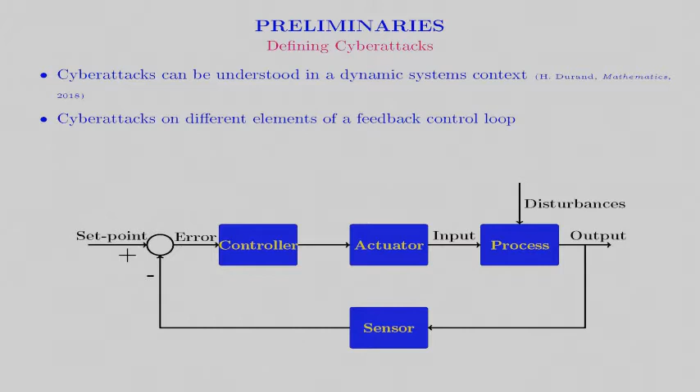In general, cyber attacks can be performed to break a typical control loop at some point. In this talk, we focus on cyber attacks that break the control loop between the sensor and the controller and provide false sensor measurements to the controller. This prevents true process knowledge from being obtained by the controller. As we will see later in this talk, this cannot be handled by techniques for handling sensor measurement noise alone.

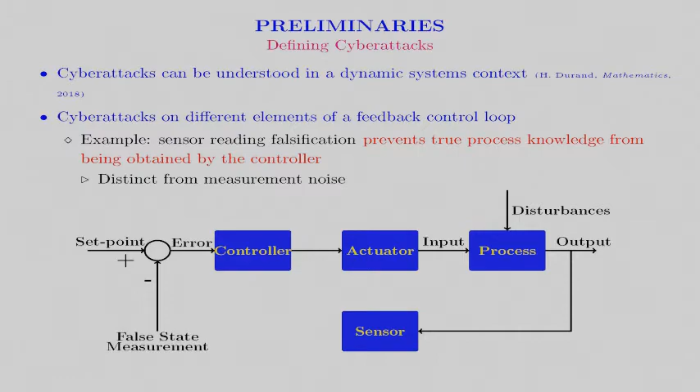In our development of cyber attack detection and control techniques, we will focus on the class of nonlinear systems shown here. This is a class of input affine nonlinear systems with state X, input U, and disturbance W, all of which are bounded. We consider that the origin is a steady state for this system and that the system is stabilizable in the sense that there exists an explicit stabilizing control law H of X that can render the origin asymptotically stable in the sense that there exists a Lyapunov function V with a negative definite time derivative along the closed-loop state trajectories without disturbances for all states in a neighborhood D of the origin.

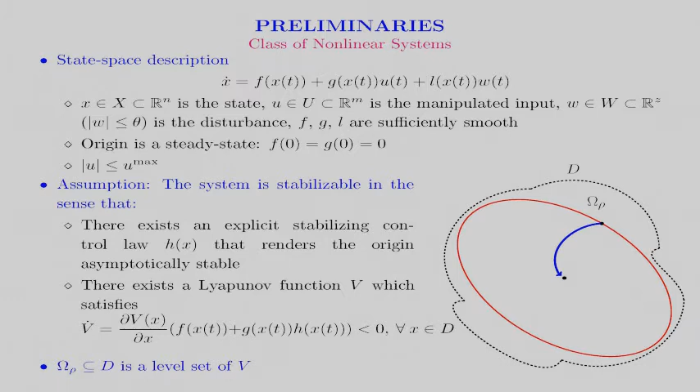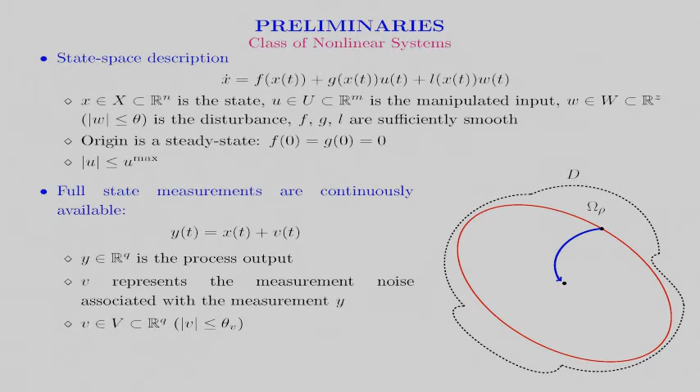We define a level set of the Lyapunov function contained within the region where V dot is negative as the stability region, shown in the figure on the right. We consider that full state measurements are available continuously for this system, but that they are impacted by bounded measurement noise. For this class of systems, we will be exploring the impacts of cyber attacks on sensors for the feedback control law known as economic model predictive control.

The general formulation of an economic model predictive controller receiving feedback of the full state is shown on this slide. It consists of a general stage cost, dynamic process model, state measurement, input rate of change constraints, and input and state constraints. The input rate of change constraints may be added to prevent the control actions computed by the EMPC from being overly aggressive. With additional constraints to be discussed subsequently, this control formulation has theoretical guarantees regarding feasibility and stability in the presence of sufficiently small bounded measurement noise and disturbances. False sensor measurements do not ensure boundedness of the error in the state measurements, and therefore do not necessarily allow these guarantees to be maintained.

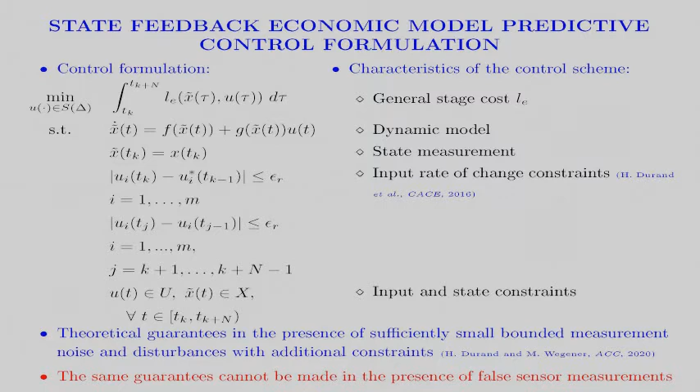The additional constraints which allow the closed-loop stability guarantees just described to be obtained are Lyapunov-based stability constraints that, when added to the EMPC formulation on the prior slide, and with a slight change in the way the input rate of change constraints are enforced for feasibility reasons, give a formulation of Lyapunov-Based EMPC or LEMPC.

This control formulation has two modes of operation, where the first utilizes the constraint shown in red. This constraint requires the state predictions to remain within a subset omega rho E1 of the stability region omega rho. This constraint is designed using the explicit stabilizing controller h of x, and that controller is guaranteed to meet all state and input constraints at every sampling time.

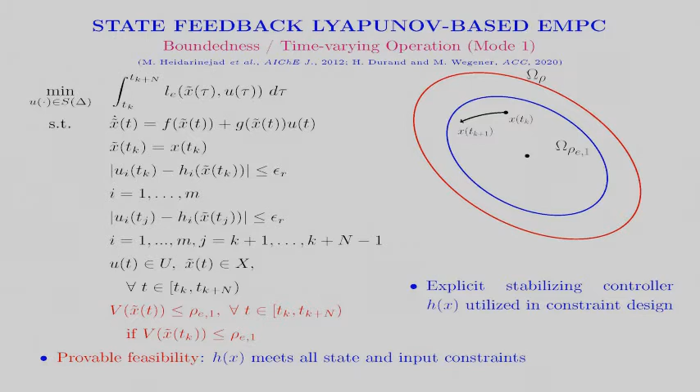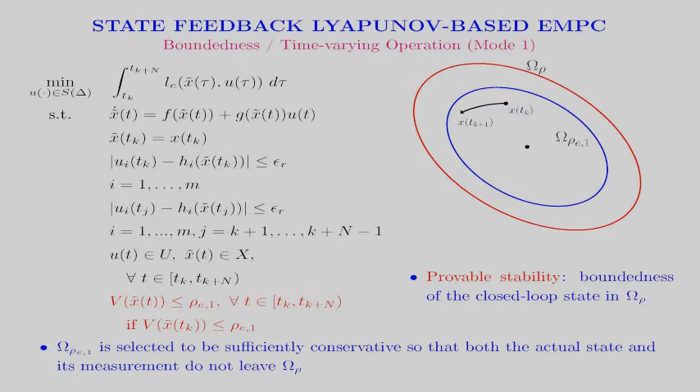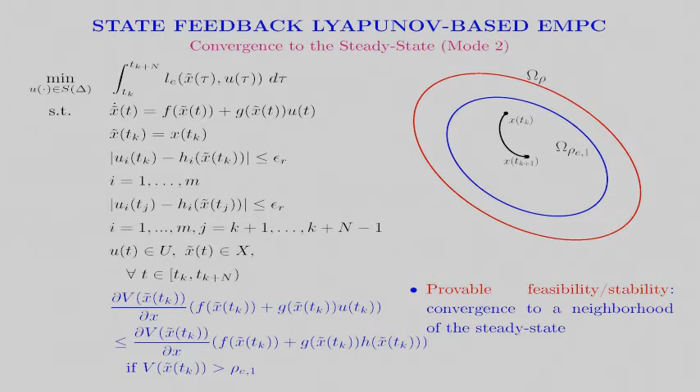Though the control law just described has attractive stability properties, cyberattacks on state measurements provided to that controller could prevent those stability guarantees from being realized. This is because even though the guarantees just described can hold in the presence of sufficiently small sensor noise, a cyberattack may act like insufficiently small sensor noise. This indicates that it would be desirable to detect an attack by looking at the deviation of measurements from the actual state. A method of approximating the actual state is through state predictions from the last measurement.

This gives one idea for a cyberattack detection strategy for LEMPC. The difference between the measurement and the prediction of the state could be checked at each sampling time. If the difference is larger than an expected threshold, the state measurement can be flagged as a possible attack. If it is below a threshold, it should be able to be tolerated by the controller for the subsequent sampling period in the sense that the closed-loop state should still be within a bounded region of operation at the end of the sampling period.

Based on the fact that LEMPC with sufficiently small measurement noise can retain closed-loop stability in this sense, it should be possible to design an LEMPC that can maintain the closed-loop state in a bounded operating region after what I'll term a sufficiently small cyberattack, meaning one which does not trip the detection mechanism, occurs. In this discussion, we see the concept of controller and detection mechanism co-designed for LEMPC, in that the resilience of the controller to the cyberattacks that are not detected for at least a sampling period after the attack occurs will come from the LEMPC's design in tandem with the threshold design on the attack detection method.

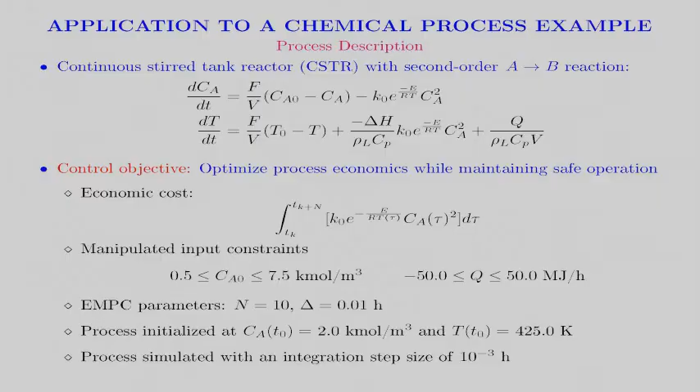This indicates the principle that in the presence of a cyber attack, for which there is a small difference between the actual and falsified state measurements, the inputs computed by an EMPC may not be significantly different. This highlights as well the reasonableness of the proposed method for cyber attack detection and closed-loop stability, involving checking how significantly a state measurement and an expected value of the state coming from the prediction differ.

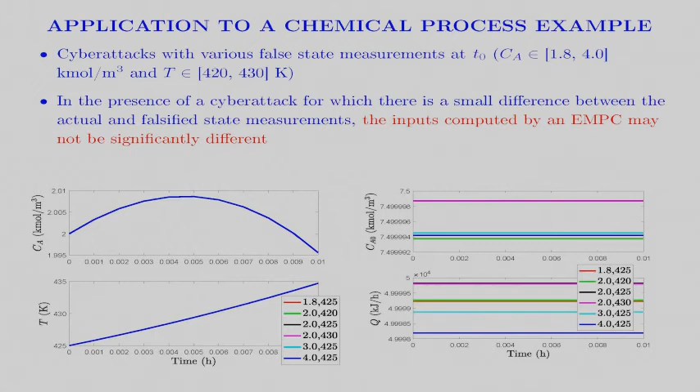Next, we look at how measurement noise and false sensor measurement cyber attacks can differ. Here, we provide a false state measurement to the controller at every sampling time and look at how the actual state evolves compared to the false state trajectory.

The false state trajectory is obtained by simulating the process dynamic model, where at every sampling time, the initial value of the false state measurement is set to be 0.2 kilomole per meter cubed and 5 Kelvin above the predicted values. These are being predicted from the last value provided as the measurement to the EMPC, which was false.

The simulations indicate that despite that at every sampling time, the falsified state measurement is within a bounded amount of the values predicted from the prior value provided to the LEMPC, there is a potential for error between the predicted and actual state to grow over time.

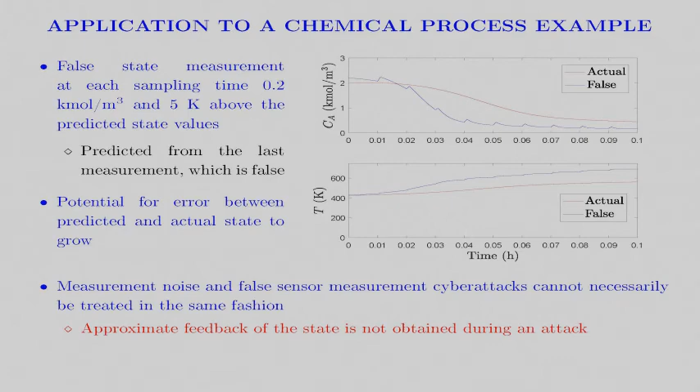This demonstrates the concept that measurement noise and false sensor measurement cyber attacks are not equivalent, because while with measurement noise there is some error at every sampling time, that error is within a range of the actual measurement. In contrast, in false sensor measurement cyber attacks, effectively, feedback of the process state is not obtained, perhaps not even approximately.

These simulations highlight that a key limitation of the proposed method for attack detection and resilient control is that the detection technique relies on state predictions. Once one measurement is falsified, the predictions are no longer reliable. A concept for overcoming this is to replace the state feedback LEMPC with an output feedback LEMPC, meaning an LEMPC that utilizes an estimate from a state estimator in its design.

If redundant state estimators are available and only the one used to provide estimates to the LEMPC is impacted by a sensor measurement attack, the others can be utilized to flag this because, in effect, they provide a check on whether the state estimate being received by the LEMPC is sufficiently accurate.

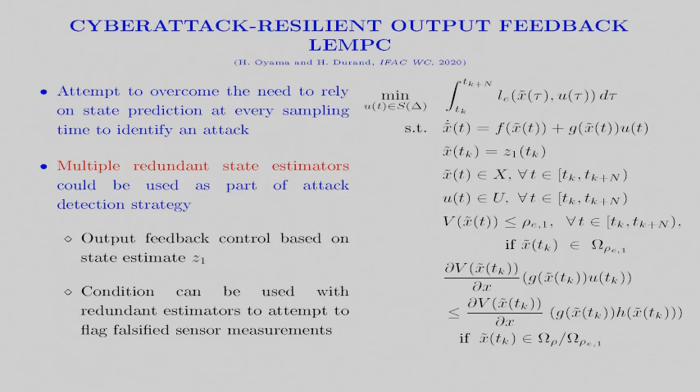In conclusion, detection mechanisms using LEMPC may take advantage of control theoretic guarantees in detecting attacks. In this work, we focused on a state feedback LEMPC formulation that was considered to mitigate cyber attacks in the sense that it guarantees closed-loop stability over a sampling period in the presence of disturbances, measurement noise, and false sensor measurements within a bound on the error between the prediction of the state from the last measurement provided to the LEMPC and the state measurement at a given time.

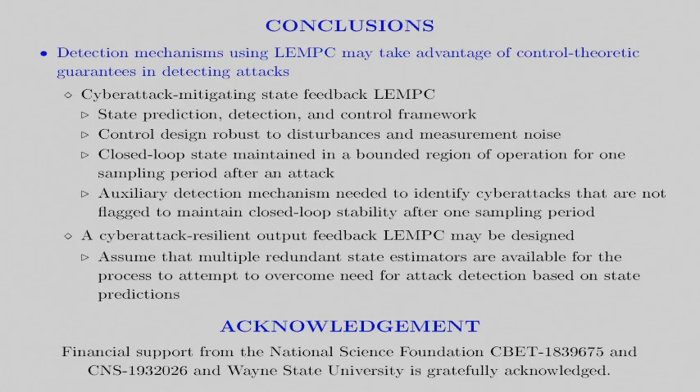When the attack is not sufficiently large to be detected at a sampling time, then if an auxiliary detection mechanism does not detect it during the subsequent sampling period, closed-loop stability could be compromised after that time. To overcome this, other techniques could be tried, such as using an output feedback LEMPC with multiple redundant state estimators, where only the estimator providing estimates to the LEMPC is assumed to be able to be impacted by false sensor measurements. We gratefully acknowledge financial support from the National Science Foundation and Wayne State University.